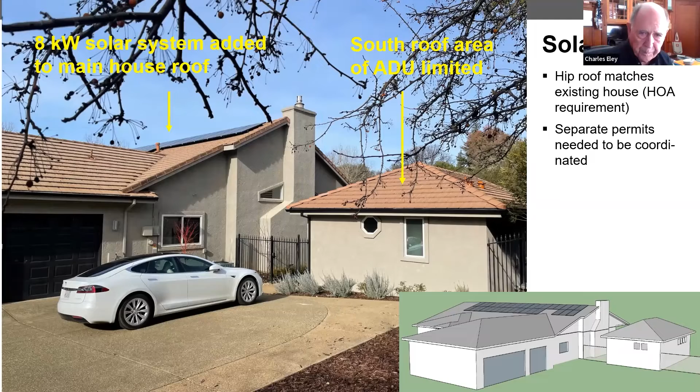Another issue, being all electric - as most of you know, I'm sort of an energy geek - I wanted to use a heat pump water heater, but we have very small loads in this ADU. The only hot water load is a single shower, a lavatory in the kitchenette area, and another lavatory in the bathroom, that's it. The smallest heat pump water heater I could find was about 40 gallons, much larger than we need. A larger issue is that these units are pretty noisy, and they need to exchange air with the main room, so you need a louvered door in front of the water heater. They generate around 50, maybe 55 decibels of noise when running - enough to wake you up if you're sleeping. This was an issue we had to deal with.

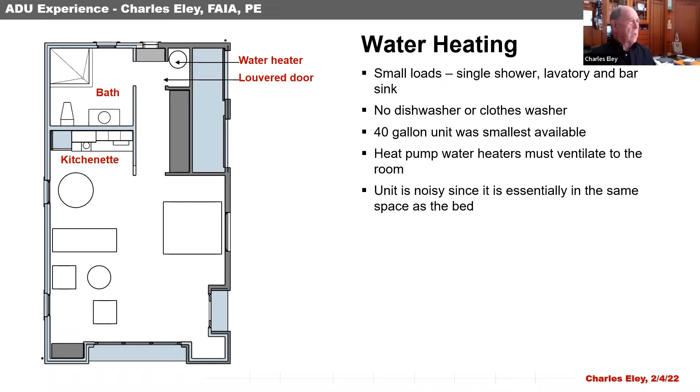Another issue I'll talk about is attic ventilation. The width of this ADU is only 18 feet, and we needed a 4-in-12 roof pitch to match the existing house. The California code requires R19 in the roof and R49 in the floor of the attic where this ADU is located, which leaves a very small ventilation area. I first dealt with this by routing all the HVAC ducts entirely within the building envelope, which seemed to work. But then the HVAC contractor made a last minute change and put ducts in the attic, which triggered a few other issues.

We also had a few issues with the Homeowners Association - they rejected the project initially. We needed to cite the legislation, and they backed off on that. When the project was under construction, we used a liquid applied waterproofing which was roughly the color of my insulation in this attic, and we got a few calls from the Homeowners Association about that.

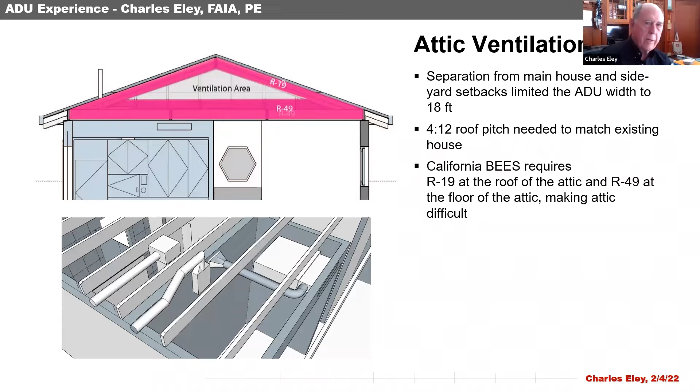But in the end, it turned out they're pretty happy with the unit. We were able to match the roof tiles, the roof slope, and the wall surface materials, and the clients are also very happy with it. So I'll stop there and pass the baton over to Adam Mayberry.

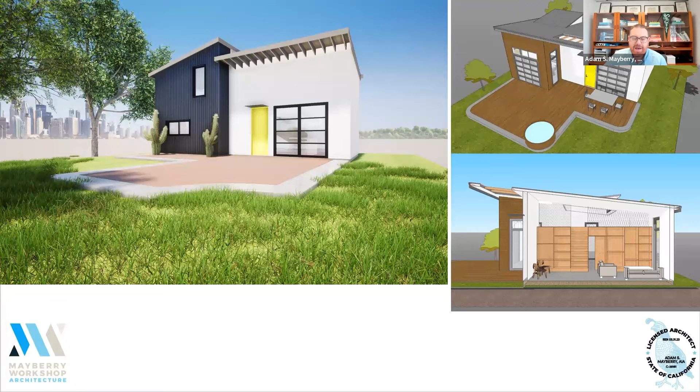This is in the Rose Garden in San Jose. Our wonderful client here really helped us and encouraged us to explore the shape and styling of the project. Here's a couple of the renderings and different views of this. Most notably, the section. Our client at the time was curating art and has a big art collection.

He mainly wanted this extra space for his family and more connected to the yard. His main house was a typical smaller cottage style home that didn't have a great connection between the living, kitchen, dining area and the yard space. So there's that, and another area for kids to play and whatnot. Really wanted that second bedroom and loft space.

Since we couldn't do a second story, we tried to do a mezzanine here. Through the process of this project, codes were changing with the city of San Jose specifically, and from the state as well. Being involved with some of the policy from the beginning, we were up on those changes coming through, and new second story and second bedroom were going to be added. You can go on to the next slide to show from the rendering here to what was built.

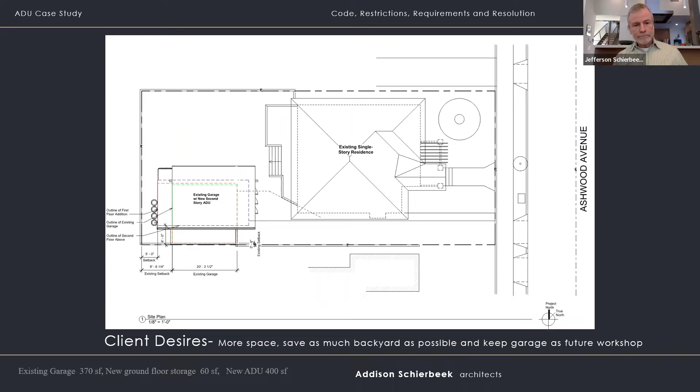The challenges we faced were fairly straightforward in some ways. In Los Angeles, ADUs have only been allowed for the last 3 or 4 years, and during that time the code has changed several times. One code change, because it was being called a residential building at the time, required an increase of a 1 foot side yard setback since we were going to a second story. The rear yard for the ADU was only 5 feet, but that caused something else.

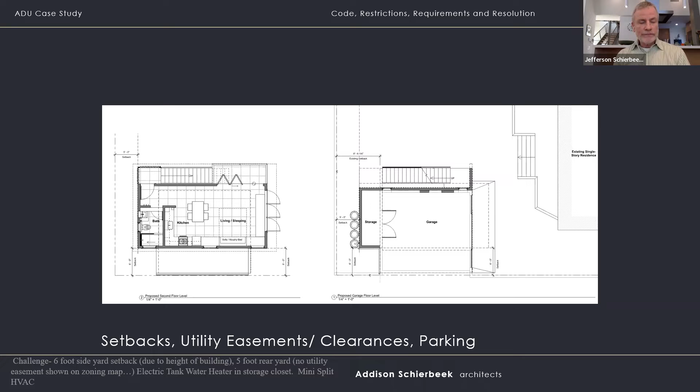As we went through the process, the plan checker never asked us to get a public utility clearance, and there was no public utility easement shown on the map. During construction, the inspector required a public utilities sign off, and when DWP sent their person out, they said we'd be too close to the power lines. You can see in the upper right corner of the upper left image where we had to press down the roof from a single flat shed roof to a flat section over the bathroom and entryway to accommodate that public utility clearance challenge.

The other issue we faced: the client wanted to go all electric. They haven't yet done solar, but it wasn't required at the time. We did talk about water heaters and the options available. In a previous project we'd used an inline gas hot water heater, and in our naivete put a preheat solar panel on the roof to comply with Title 24.

In the end, in a remodel of the house, we found we had to increase the amperage to the facility so much that it was actually cost prohibitive. So we pulled out that water heater and put in a tanked electric hot water heater. From that lesson, we did the same here, and we were able to put that in and comply.

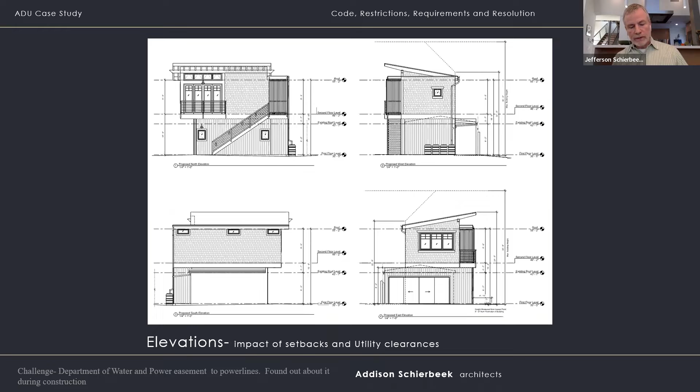Some images: the upper left corner shows looking to the rear of the house with the ADU above the garage. The lower left image shows the ADU over the garage with the privacy screen around the entry as you walk up the stair. The image on the right shows the lowered roof and the utility lines. That was probably the big challenge, and an interesting one to address.

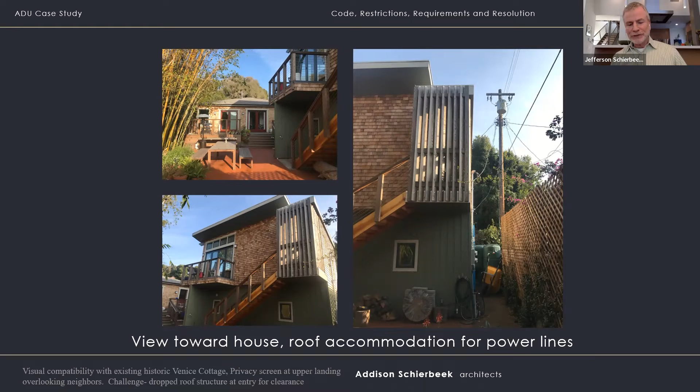There's an image of the ADU from the rear yard. The garage door isn't quite done. The client, as his want, is going to make the garage basically into a wood shop and is putting different doors on it. So thank you very much.

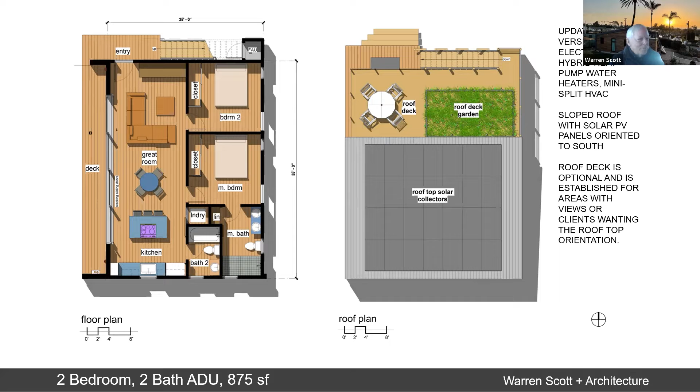The other option here is that we can do sloped roofs in any direction to accommodate solar collectors. I also didn't note this, but the idea is that we could create this as modular type construction, where you could split this thing in half and have 2 units, 13 by 36, to be shipped to the site and then combined together. We're looking into that possibility. We've done about 3 of these projects so far. This one right here, if you look at the next slide.

This is a unit that's actually built on my property. We did this for my 97-year-old mother-in-law, and she's living in it right now, very happy and very mobile and very happy with it.

We used fiber-on material on the outside, which is a simulated wood. It has a long life, and it's a little costly up front, but low maintenance in the future. We carried the metal slope roof down the backside to create the character, a very contemporary thing. Large doors on the side face west to bring in solar sun in the winter, and then we have large blinds on the outside to cover them up in the summer to prevent the sun.

The interior we kept tall and open. It is narrow and long, but it works very well. We used some wood structure on the ceiling, or wood finish on the ceiling, to give it a warm character. You can see there the sliding door for covering up the washer dryer.

And if you're really focused, you can see through the window of a biffy for the project next door.

I wanted to show that down below on the lower right is the exact same floor plan, but reversed, using all different materials for a different site. That house on that site has all clay tile and stucco, so you can use the same concept and still make it work.

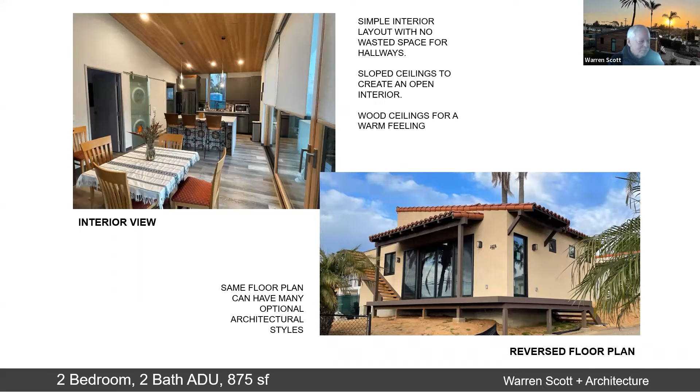I'm bringing up a whole new concept here, an issue that we're having. We work a lot of projects in the downtown Encinitas area, and the hatched area shown here is what the Coastal Commission has created for us as being very difficult in the downtown area.

According to the new rules and regulations of the Coastal Commission, any building or ADU that displaces any parking within this area must be mitigated on site, or we must create enough parking to compensate for that. This is against the rules and regulations of the actual code presented by law, which states that if you displace that parking, you don't have to replace it if you're within a certain distance of a bus station, train station, or otherwise. We submitted a project that's downtown, and right now it's been denied because we can't do the parking that we need.

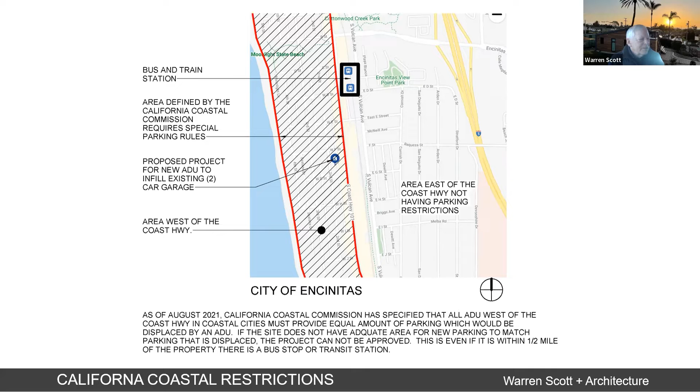This is the project. It's mixed use, and we have the allocation of the garage below that we could convert to an ADU, approximately 450 square feet. It would be a one bedroom. We've been denied because we can't get the parking on the site to compensate for it.

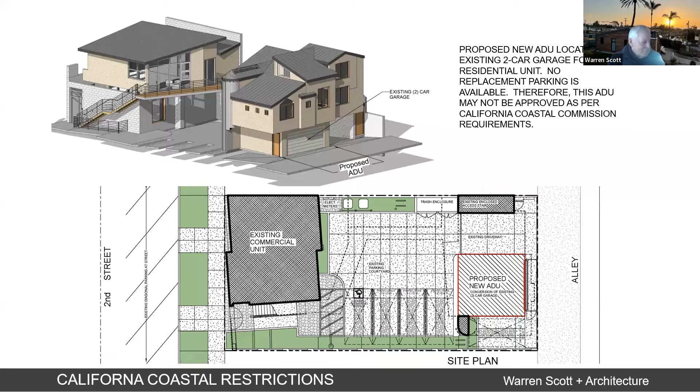So my question is, does the Coastal Commission actually have the legal right to overlap and control our legislated laws? I would like to pursue this further and see what we can do about it, because it affects a lot of the coastal projects along the cities and the coast. Basically, that's my presentation. Thank you very much.

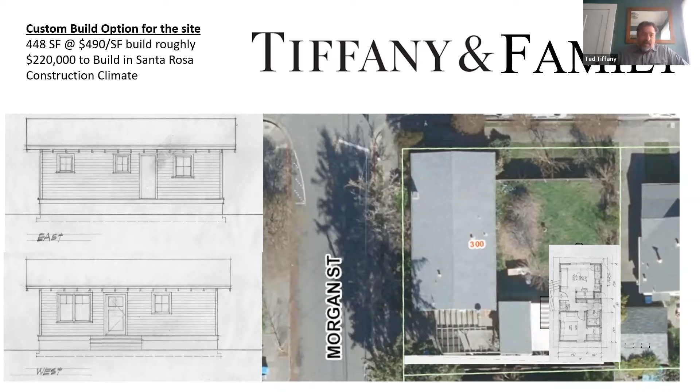So I needed to come up with some solutions. I was working with this really great group called Homes for Sonoma that were building modular ADUs for the fire rebuild area, just to bring housing to the county.

Quattrocchi Kwok Architects, Axia Architects, Eighth Wave Construction put together this package. At the time, I wasn't considering doing any factory built housing. I wanted to do it custom, but this opportunity came through to get a modular construction home that was factory built. We won't call it modular, it's all one unit, but it's right about $175,000 for our final cost.

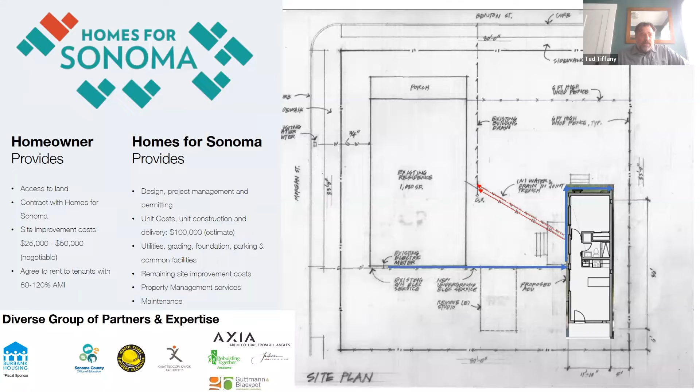And the site costs are really expensive right now. The actual unit with delivery is only about $100,000, and this is factory built up in Washington State.

This was a really difficult decision for me because I live in a historic district and wanted to make sure this unit fit in with the historic district issues. Mine's a beautiful craftsman home and I didn't want to ruin the look. We were actually allowed to build a 1,200 square foot granny unit, bigger than the original house, which would have been front facing, but then I'd have had to deal with a lot of historical issues. So this brought the granny unit back and to the left of the property.

So it's off the property line. You won't really be able to see this too much from the fence line. Next slide.

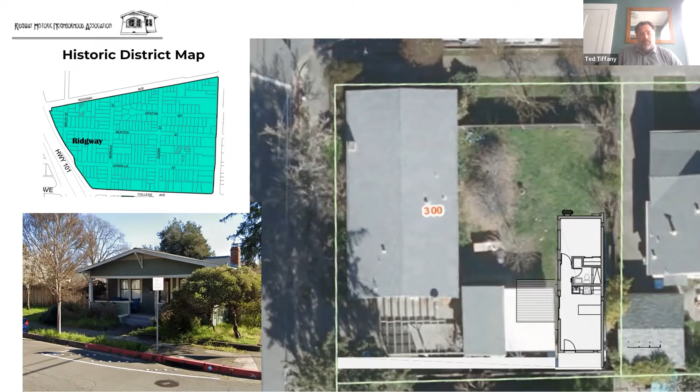As Charles noted, we had some space issues in this. This is a very small, compact unit, about 430 square feet of conditioned space, about 480 square feet overall with the decks.

The water heaters were an issue, right? Charles noted that the heat pump water heaters were required in Santa Rosa, which has an all-electric reach code that I helped develop for them. We had to put in a heat pump water heater to meet compliance.

And that sound issue I was very well aware of, Charles. So we went with a split system in this one, so it'll just have the tank alone. The condenser will be outside on the wall mount, but it's really overkill. It's a very expensive unit, and the BTUs on it are way overkill for this small shower, bath, kitchen arrangement.

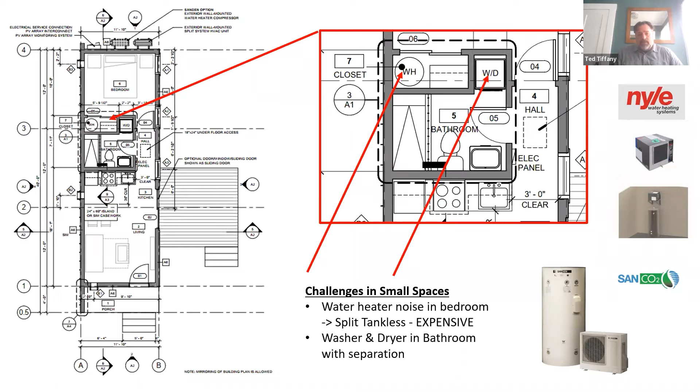So I was looking at the Nyle units, which are about half the size of the standard units, to do this same project. I might actually do a pilot with them and switch out that standard unit using the same tanks, which gets that noise issue out of it. Next slide.

So here's a look at the unit. This is sitting up on the manufacturer's lot in Washington, and it's going to be trucked down and placed on the lot in a couple of months after we get the site permit finished off.

Pretty unit, gorgeous interiors. It's going to all come pre-finished — floors, everything, cabinets, appliances already in it, delivered. So this is really kind of a turnkey solution. They're going to roll it onto the lot, put it on the permanent foundation, and it'll be plugged in from the utilities we have on site.

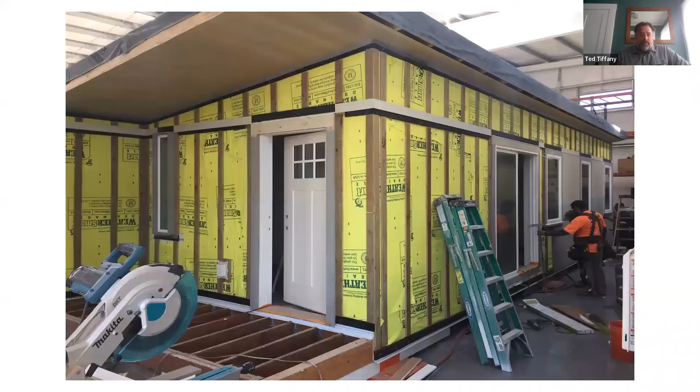So that's the unit in construction, and that's Homes for Sonoma, if you want to learn more about that.

One more slide, I want to talk about some of the issues. Really the challenge for our rebuild area is just the costs. So this was a cost solution and a speed of construction issue. I'm going to do an embodied carbon analysis on the transportation versus the build and all the materials in Washington State, but right now for our issues, local fire code permitting is a challenge.

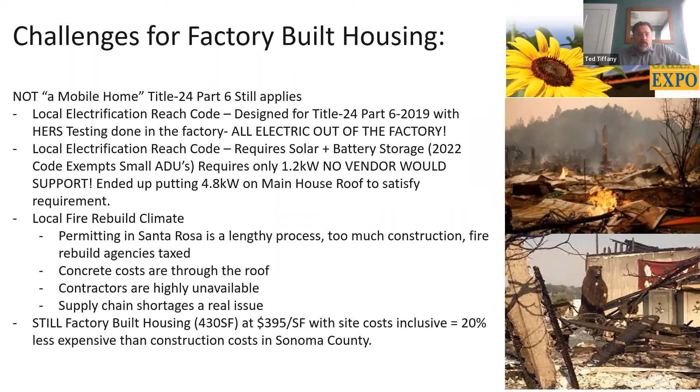And I wanted to give you some last resources. I know we're on time — click to the next slide.

One of the bigger issues we had was PV on this ADU. It's required by the Energy Code in 2019, and I couldn't get any vendors to give us a 1.2 kW system that was required for this building. So we actually did what Charles did on his ADU — we put in a 4.8 kW system to cover both the existing house and the ADU loads.

Energy Code Ace, who we do a lot of Energy Code education through the state, is supported by the California Energy Commission and the ratepayers from the IOUs. We have Energy Code fact sheets for accessory dwelling units, and we do 30 to 90 minute live seminars on request diving into the Energy Code issues. 2022 will bring some significant changes for ADUs to look out for, so those fact sheets will be coming out for 2022 shortly.

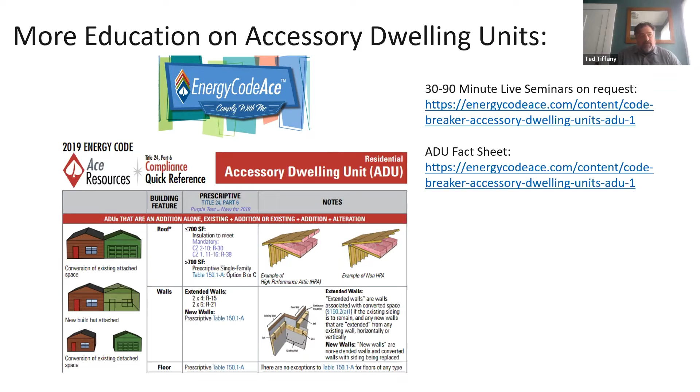So Michael, I'll pass it back to you.